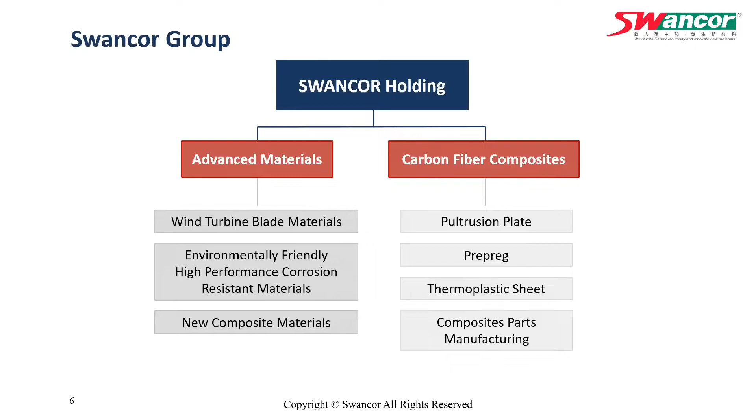So first things first, I would like to announce Swancor is turning 30 years old this year. And Swancor Advanced Material was listed on the stock market in 2020, last year. We also have 2 integrations. The first one is Meijia; we formed a strategic alliance and acquired about 23.8% of its company shares, to secure access to upstream epoxy raw materials. The second acquisition is COTECH, a carbon fiber composite manufacturer, for applications in aerospace, automotive and military.

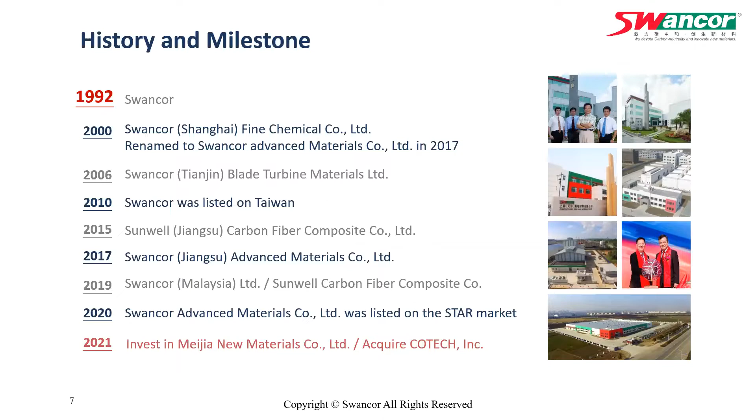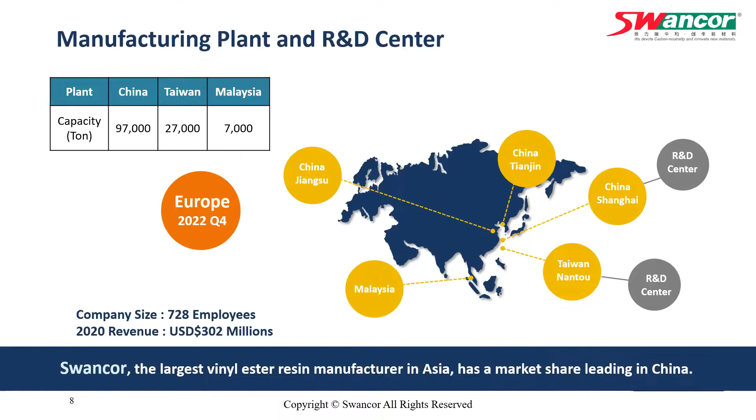Swancor has 5 manufacturing sites in Asia, as indicated in yellow, and 2 R&D centers. Our European production is expected to be online by the end of this year in Q4. The current company profile is about 728 employees, and 2020 revenue was about $302 million US. The total capacity is about 131,000 metric tons, which makes us the largest vinyl ester manufacturer in Asia.

Swancor products started from corrosion resistant resins and extended into wind turbine blade technologies. HYVER resins also play a very important role in these applications, for building larger wind turbine blades. Swancor also offers flame retardant epoxy resins that meet the EN 45545-2 standard. And in the effort to be environmentally friendly and address VOC issues, Swancor makes it possible for customers to select lower styrene content in vinyl ester resins, minimized to less than 35%.

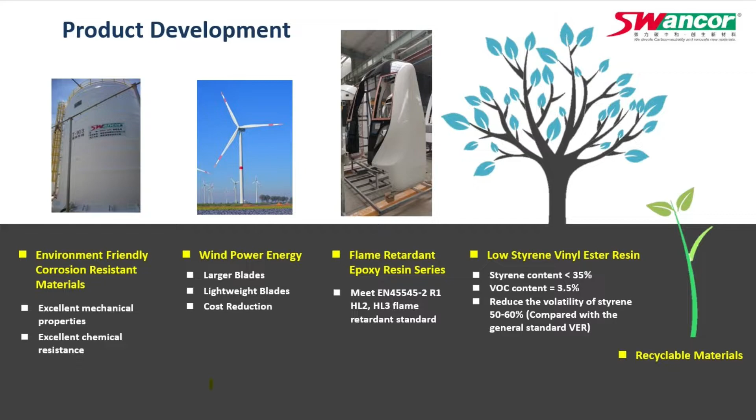And now we are committed to a better sustainable future for mankind. Our next effort is to make degradable resins available so they can be truly recyclable. Regarding Swancor Group's ESG, our ESG committee was established in 2015, and ever since, we've been receiving Taiwan Enterprise Sustainability Awards for 7 years in a row. Swancor is also recognized as 17th in Commonwealth Magazine's Growth Top 100 Taiwanese Enterprises in 2021, and among the top 50 Taiwanese enterprises on carbon reduction.

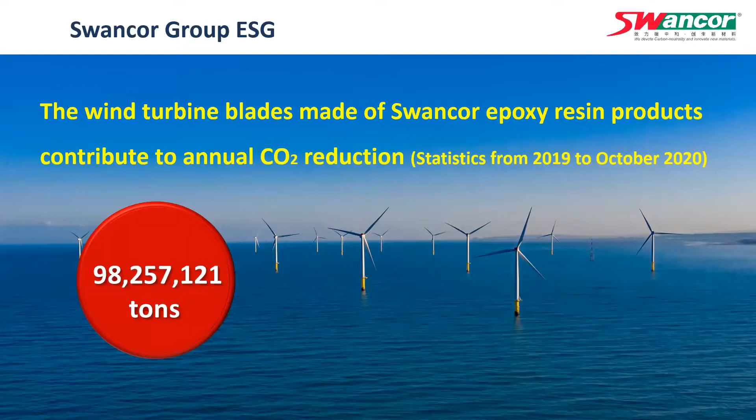So, talking about carbon reductions, this page illustrates how seriously we are committed to carbon reduction and the important role we play in this industry. We are proud that our resins were used to produce wind turbine blades that reached CO2 reductions of more than 98 million tons between 2019 and October 2020. And this year, we launched our new company slogan: we devote to carbon neutrality and innovate new materials. This is our brand promise, and we mean it. And that's about the updates.

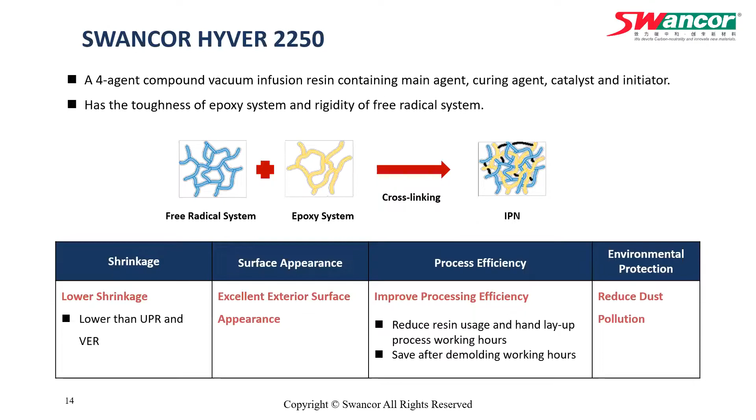And finally, the surface treatment gets much less polluted with dust. So we can say SWANCOR HYVER 2250 is an environmentally friendly product. And from this slide, we'll show you some technical issues for SWANCOR HYVER 2250. First, it is a radical modified vacuum infusion resin with lower viscosity, long gel time, and lower shrinkage compared to UPR and VER. It's suited for any kind of large structural product with infusion process. And it has good adhesion with UPR gel coat and good wettability with glass and carbon fiber.

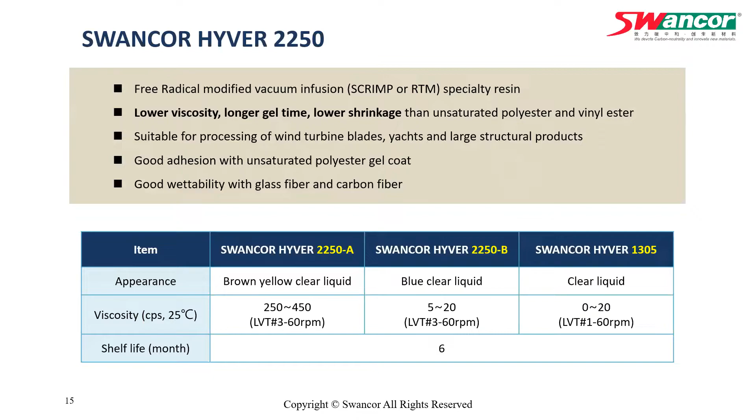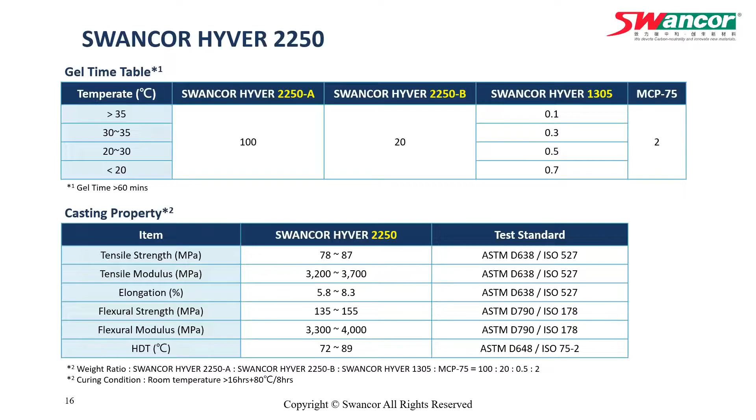And the second table is about the casting properties with tensile, flexural, and HDT. And SWANCOR HYVER 2250 already got DNV approval, which means the mechanical properties can fit the requirements of the yacht and boat industry. SWANCOR HYVER 2250 has had research and development for a few years. During this period, SWANCOR had deep cooperation with Atech Composites, sharing mutual resources and supporting each other. Today, fortunately, we invite Atech Composites representative Jack Hong to introduce the application case, showing more concrete and specific results. And Jack, now it's your turn.

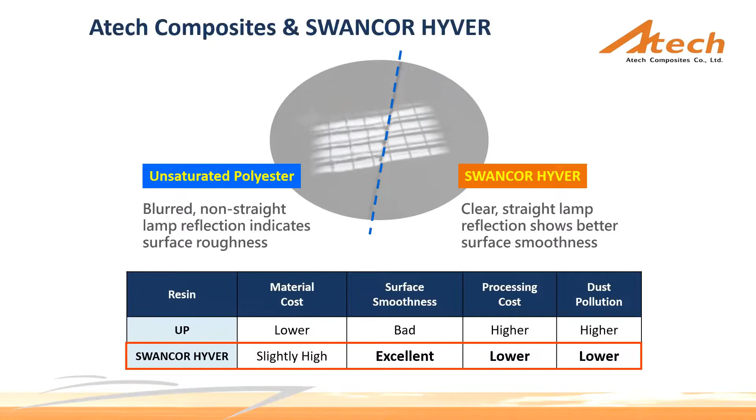Let's take a look at the photos in this slide. These are the test panels we made for HYVER resin testing. We would like to make a comparison between HYVER and unsaturated polyester. As you can see, the test panel made with HYVER has a better surface. The surface is clearer. The lamp reflection is straighter than on the test panel made with unsaturated polyester. So my opinion is that the first advantage of HYVER is lower shrinkage and better looks.

But some people may say using unsaturated polyester can build a boat which also has a nice surface. Honestly, they are right, because we did it with the same idea before the HYVER application. In order to block the fiber or the grooving pattern from being printed on the surface, builders always lay up a skin coat after spraying the gel coat. Generally, the skin coat is made by hand lamination; it is a resin-rich layer and it is always thick. The builder would build a thick skin coat to block the print-through phenomenon.

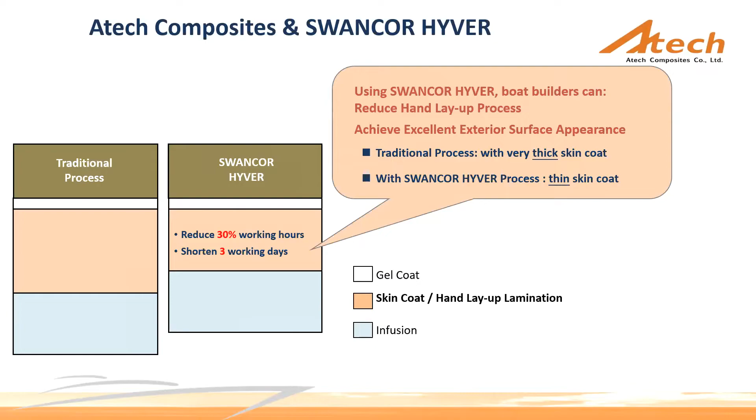For luxury yachts, hand lamination is necessary, but it is really time-consuming. By using HYVER resin, we can save labor hours and construction days in the hand lamination stage, and we also keep the same surface quality.

Also, in some cases, the builder built the boat by infusion process, but the skin coat is thin. So after demolding, we usually see a really bad surface, and these builders need to do surface fairing work to eliminate the bad surface. The main process to eliminate the pattern is always to rough grind the gel coat surface.

After grinding the gel coat, if these builders find that gel coat coverage is not enough, they have to respray the gel coat. And after respraying the gel coat, they also need to do rough grinding and soft sanding work. During the rough grinding process, lots of dust or particles will be scattered in the factory.

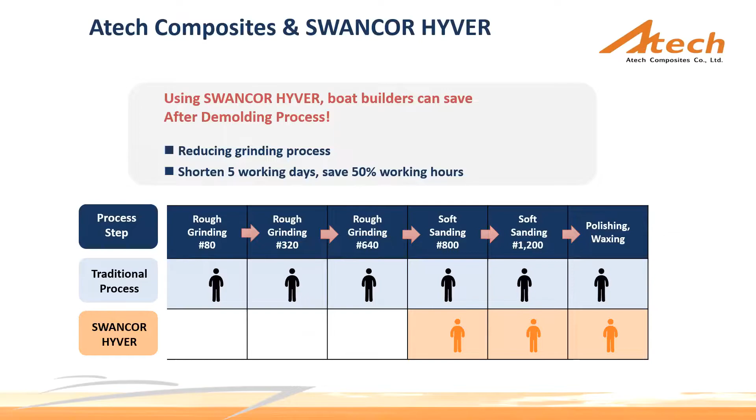HYVER helps us get a better surface, so only soft sanding or wet sanding is necessary. We save the labor hours of fairing work. Also, we create a better environment for our technicians. So here are the records of our actual application that I would like to share with you.

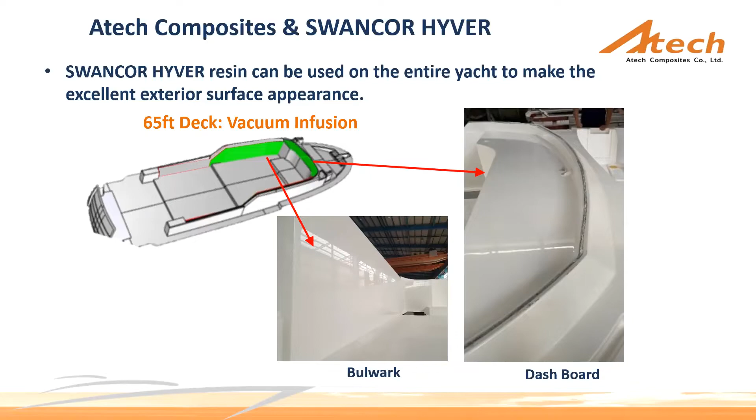This is a deck of a 65 feet monohull yacht. Actually, it is the second trial production FRP part in our factory. The pictures I took are the bulwark and the dashboard, because they are high visibility areas and the surface appearance is really critical. After demolding, we found the reflection from this area was straight and clear. At that time, we were more confident with HYVER resin.

And this is a deck house of a 65 feet catamaran. It is the third trial production FRP part in our factory. When we built this deck house, the weather was hot, and we were a little worried about the curing condition. But after demolding, we saw the foredeck area looked better than we thought.

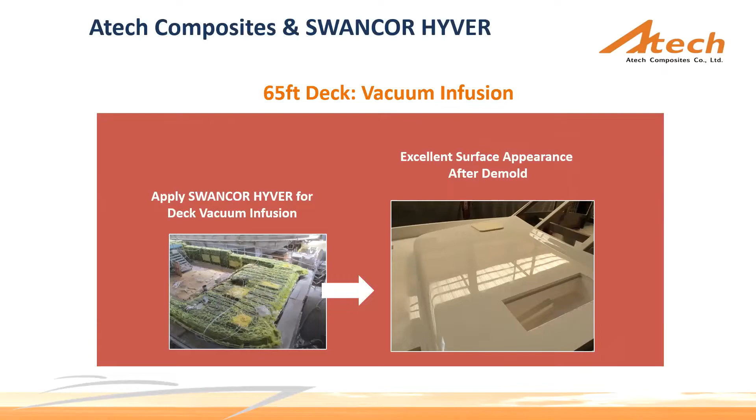Then this is the biggest trial production part of HYVER application in our factory. It was a 75 feet yacht hull. We infused the whole shell, girders, and the stringers in one shot. Basically, the surface above the chine line is a high visibility area when it sits on the cradle.

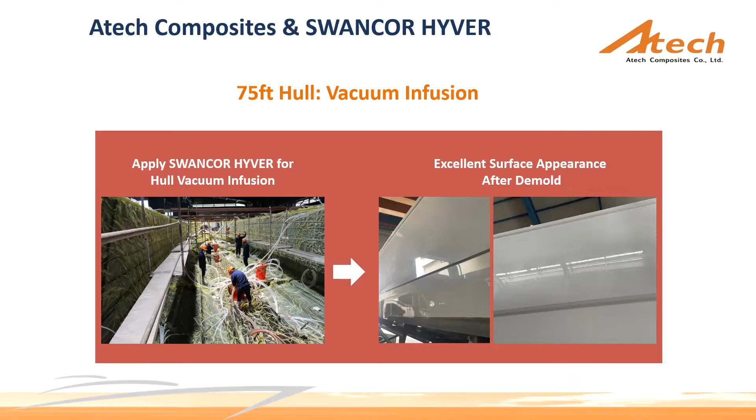So you can see the reflection was straight. You can even see a deck house reflection on the topside. The surface was really, really great. SWANCOR and Atech integrated the material and the process together and applied for patents in China and Taiwan. With our efforts and cooperation, now it is a patented technology.

Based on my application experience, here are my brief conclusions. The first one is HYVER has lower shrinkage, which makes the surface look better. The second one is we save labor hours and we have less pollution in our factory.

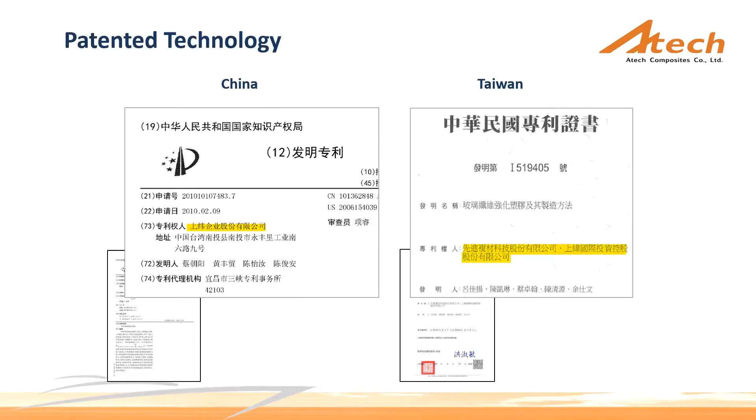It is very impressive that SWANCOR HYVER can make such an improvement to working efficiency and also the environment because of the lower shrinkage and better surface performance. So I think everyone also wants to know how to implement HYVER at your or your customer's site. So here I would like to share the implementation diagram that can make the evaluation process go more smoothly.

First of all, I want to mention that although SWANCOR HYVER is a different concept product from existing two-component type resin, customers can still evaluate with their existing equipment, because our target customers for HYVER are shipyards already manufacturing their products with vacuum assisted infusion processes, such as SCRIMP or VARTM.

So SWANCOR will provide a manufacturing guideline with the technical information and practical onboard testing data to you, so you can check whether you or your customer has this equipment or not. So basically, customers can do the evaluation if they already have the two-component mixer, which is used in the infusion molding process.

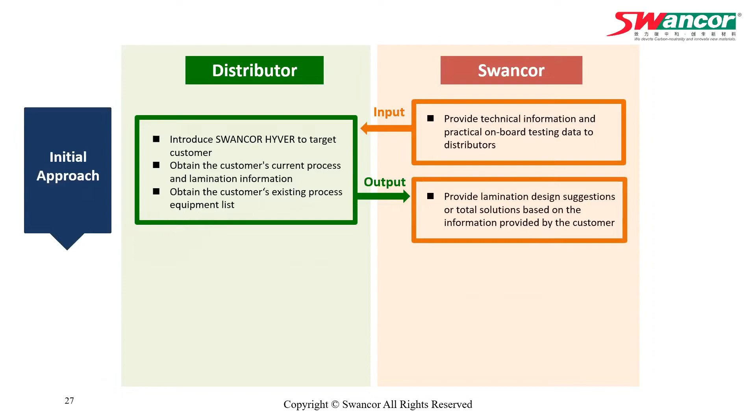So in order to provide a suitable design suggestion for our product, we need information about your current lamination design, such as the thickness of each layer or the grooving design data. Then we will provide the lamination data and process suggestions to you based on this information. It will cost more time to test if we cannot get sufficient information, so please help us by providing as much data as you can.

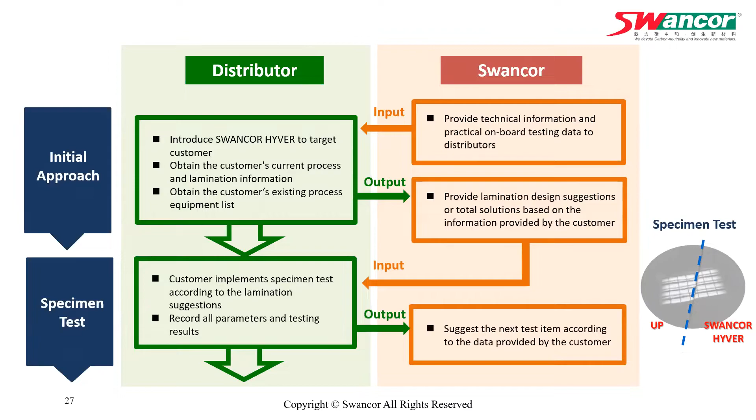At first, we recommend you evaluate our product with a small specimen based on the design we propose. In this stage, you can get more familiar with the manufacturing process of HYVER, and you can also see the difference between UP and HYVER, just like the picture on the right side. And our technical service team can optimize the parameters based on the results you record and provide better parameters for further evaluation.

If we get the optimized process parameter in the specimen test, you can conduct the trial production from the small part first, such as the hardtop or the radar arch, and then to the large parts such as the bulwark and hull. It is very important that we need you to record the process parameter and the result, so we can discuss with you and then tune the parameter to meet your requirement in each part. It will take several iterations to get the best result in every part.

And also, meanwhile, you can build up your own database about how to manufacture your product with HYVER, and it will be very helpful in the future mass production. Finally, you can start to conduct the practical onboard testing based on what we get in the previous trial production stage. And our technical staff will still keep on providing any information you need when you have any problem during the mass production. And this is what we get and learn how to implement HYVER into customer sites.

Although it may have many steps to do, I believe it is very worthy to improve your process efficiency and also the working environment with our SWANCOR HYVER.

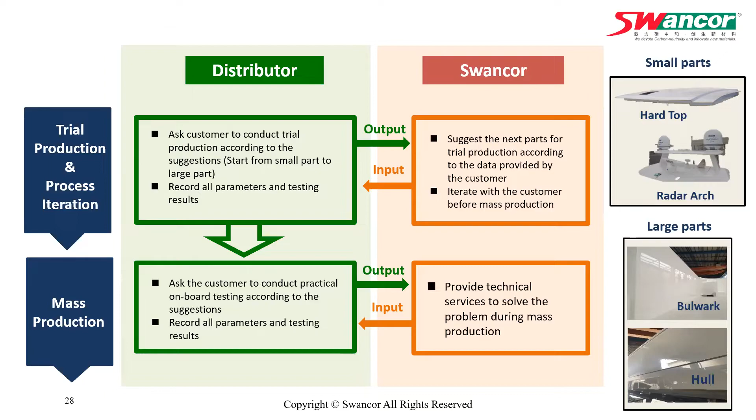Yeah, and this is my part. I would like to pass it back to Stephen.

Thank you, Jackson. So in summary, SWANCOR HYVER technology is designed for vacuum infusion process. And the ideal applications are making boats and large composite parts fabrications. And the major benefits of SWANCOR HYVER resins is a lower shrinkage rate, and that improves the lamination processing time by up to 30% working hours reduction. And the post-treatment process can be reduced up to 50% of the grinding time hours as well.

As our topic focus today is the marine industry, the ideal customer is the shipyards with the existing vacuum infusion process in place. So as for implementing these HYVER technologies, Jackson's introduction shows the importance of the steps in the diagram, and it is essential to understand your production parameters. So when we make our recommendations, we can be more precise, and that can help you to shorten your developments as well. So that's our HYVER webinar today.

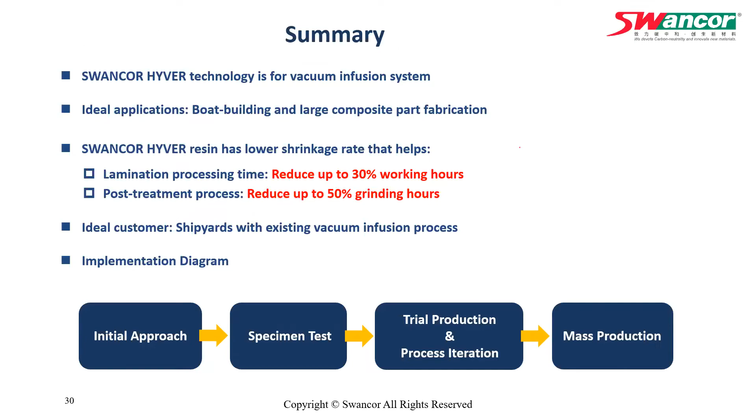Okay, and let's start with the Q&A section. I have two similar questions that were registered when you signed up, from Chris and Sean. The question is asking to understand all the benefits versus the competition and also the benefits of using HYVER resins.

So in response to this question, HYVER 2250 has a lower shrinkage rate and lower VOC than the vinyl ester and UP resins. And that translates in your production to less VOC during production and a lower surface shrinkage rate, resulting in a better surface quality. And the better surface quality effectively reduces the post-processing grinding costs and labor. So that also reduces the dust pollution on site as well.

I have a question asking for the equipment requirements for using HYVER. Jack, do you want to reply to this one? He's asking for the customer's capability, capacity or related equipment to use HYVER. So you have the first experience.